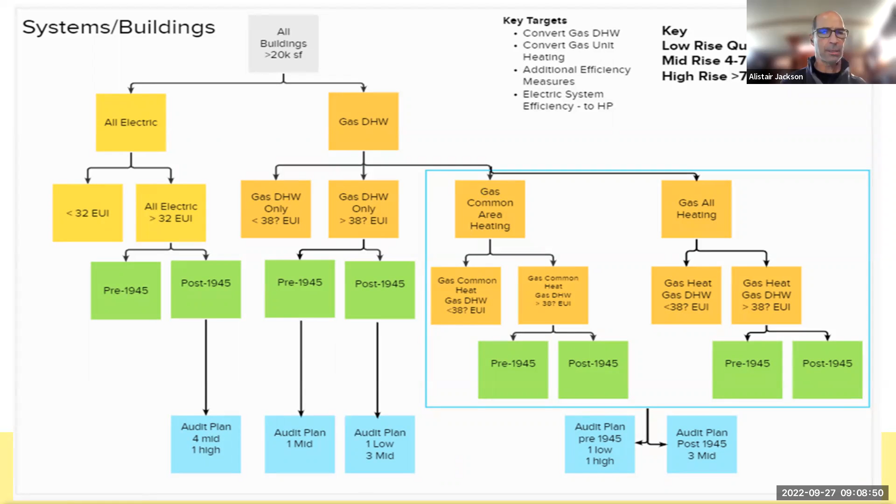Of course, subsequent to all of that, the city's building performance standard has rightly focused on carbon emissions rather than EUI. And so that changed the game a little bit, but that was sort of where we came from. And by the time that change happened, we'd already got pretty deep into characterizing and selecting buildings. So we had a group of 15 buildings initially, narrowed down to the 13 that you see here, which we actually targeted for audit.

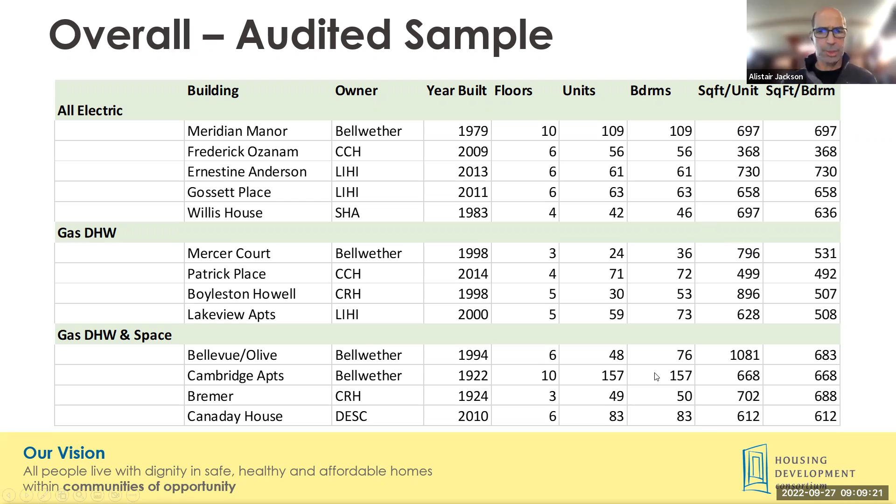And yeah, fairly good mix in terms of ages, sizes. You'll see quite a lot of consistency in terms of the unit areas, with a couple of exceptions, which I think are worth pointing out. The Frederick Ozanam building, noticeably smaller square feet per unit. And I should note, this is the conditioned floor area of the residential building divided by the number of units. It's not the average area of just the residential units themselves, so a slightly different number.

Also Patrick Place, which is another Catholic Communities project, lower than average. And then Bellevue Olive, significantly higher than the average. And again, this is square foot per unit, not per bedroom. And you'll see there's quite a bit of difference in terms of the bedroom to unit counts. So that was the original plan.

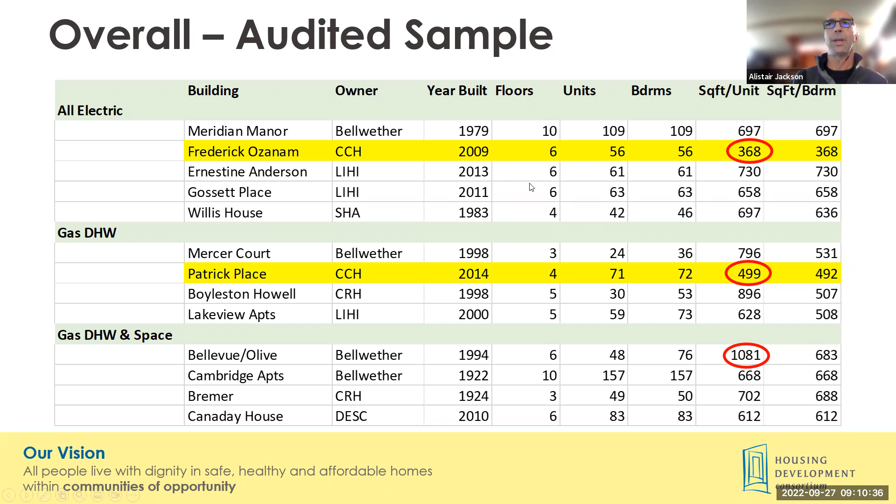Unfortunately, we were never able to engage effectively with Catholic Communities Housing during the window of opportunity. They came back to us ultimately a little after we'd finished the field phase of the work. So unfortunately, we never actually got into those two buildings, but they are included because at least some of the background research and the benchmarking information and the analysis that came out of that benchmark data is all included in the report, even though we don't have physical on the ground audit results.

Just a couple of things to call out here. We're using the OSE benchmark data primarily. There's some background information at the report level of the audits that also comes from the Office of Housing data. So we did combine those two data sets in order to get as complete information as possible and try and resolve and identify any conflicts where we could. For the most part, the numbers you're seeing today are based on the 2020 benchmark data. And it is the weather normalized data rather than the actual year. So a little bit of difference. I will say there are some slight inconsistencies in the data.

And so the numbers that you see here might differ slightly from what you might see in the benchmark information that you look at. But those things will be explained in a little more detail in the report. We've standardized everything to kilograms of carbon dioxide equivalent as the sort of base metric.

This information comes in all kinds of different forms. Pounds of carbon per megawatt hour, pounds of carbon per mega BTU, lots of different numbers. We're trying to be consistent here with kilograms of CO2e because that's the metric again that the BPS is likely to be using.

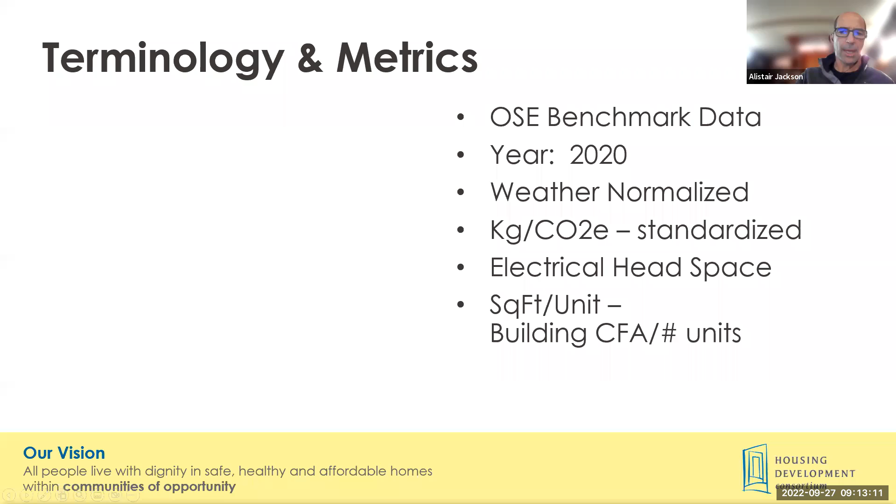Okay, so just to give you a quick summary, as I say, we started off looking at EUI and sort of just to slice this a couple of ways of the 13 buildings. What you'll see here is a summary of the EUIs. And so if we look at that 32 number, you can see that pretty much everybody, with the exception of Ernestine Anderson, who I think is actually right at 32, everybody is above that state metric. So that's point number one.

One of the things that we'll carry forward into the recommendations conversation is if you look at the EUI based on a per bedroom count, you'll see that for the most part, we get pretty consistent information because for the most part, the buildings are pretty similar. The one exception is Frederick Ozanam, which, as I pointed out before, has a high density count. Instead of 650 square feet, roughly, as the average bedroom size, Frederick Ozanam is at about 400, I believe.

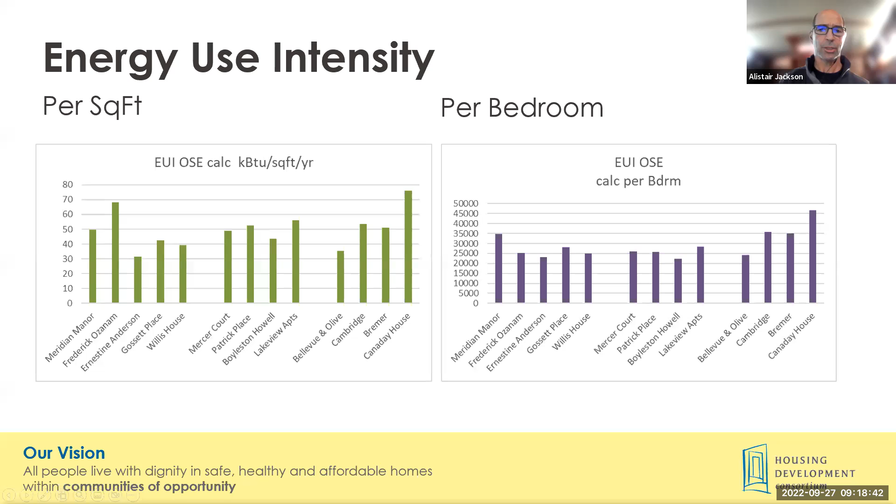So it's probably relevant to think of that in the bigger context, not just the 13 buildings we're looking at here. If the average unit size here is 650 square feet, and in market rate it might be higher than that, that places a higher burden on affordable housing with that higher density than it does on market rate. That's one of the things that I think is a key consideration, and it holds true in the emissions intensity figure as well.

The big difference here, of course, is that because all these 5 buildings are consuming Seattle City Light electricity, and only that electricity, their emissions are very low. So against the emissions targets, as an all electric building, you're in good shape. The difference comes as we start seeing fossil fuel in the building; then the emissions go up significantly, and that's where we have a difference. Does that answer the question? Yeah, it does. Thank you.

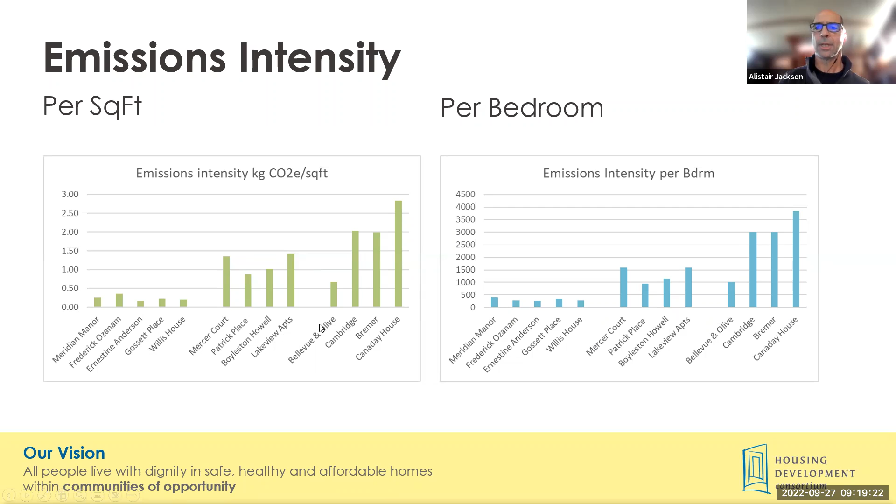Great. So coming on to the all electric buildings, just to bring this into focus, the bars I've placed here are sort of arbitrary at this point, but a reasonable assessment: the EUI is at 32, which is the target for the state clean building standard for multifamily buildings. The bar on the emissions is at 0.22, which may be the order of magnitude we might see from the BPS.

The thing that obviously jumps out is, number one, if you're all electric, you're actually looking pretty good. For the most part, all these buildings are in fairly good shape. The one significant exception is the Frederick Ozanam building, because of this density anomaly. I think this is key, so we'll talk about it more further on.

May I ask a very dumb question? There are no dumb questions. I think I know the answer, but if you're an all electric building, what are your options for reducing your emissions? Is that really just to increase energy efficiency? If this is better addressed later on, that's fine, but I'd love to better understand that. It's a great question, and a key one, but I am going to come on to it further on. If you'll hold it, we'll come back to it. Okay. Yep.

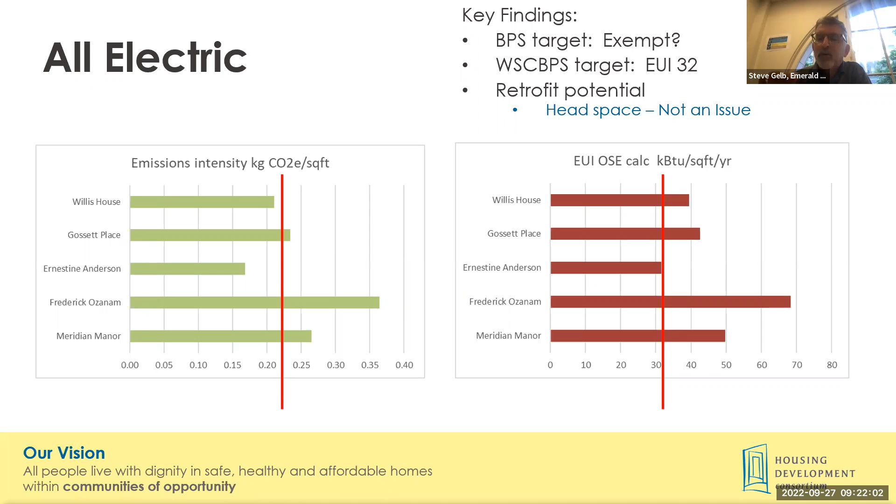Alistair, is that the electrical capacity available in the building with the panel, or the electrical capacity to the building from the utility? Good question, that was my question as well. Yeah, and they are different. I'm not going to go into that in too much detail, but the two levels of priority are: one, what's available in the building, and two, what's available at the transformer.

And is the transformer in the building or is the transformer in the right of way? All of those things are relevant and become much more relevant when we get into the buildings that are currently using fossil fuels and looking to retrofit. So we'll circle back to that as well.

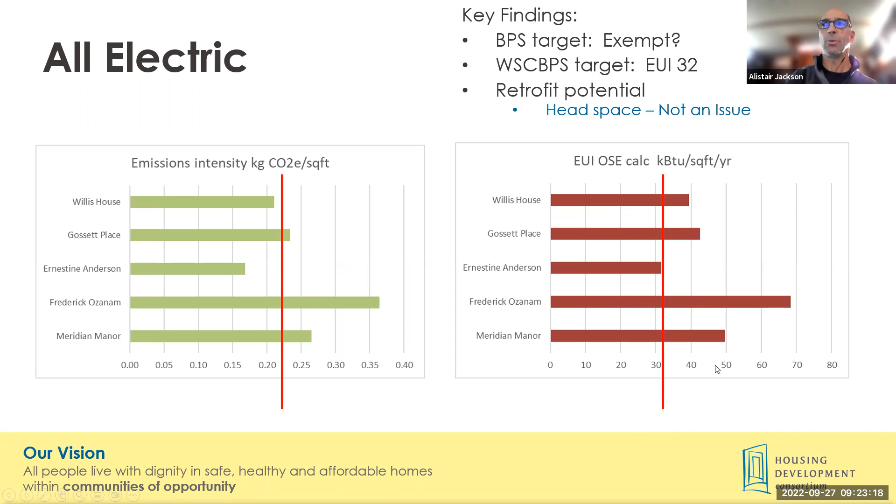I think the key to be aware of here is that the state timeline is looking at a 2026 startup, primarily looking at planning and benchmarking and so on at this stage. But obviously in the legislative process and in the rulemaking, there is this possibility of either incentives available or eventually some kind of regulation of this EUI target. So this is something to be aware of for all electric buildings, is that their EUI may become a relevant factor down the road.

So if we come on to look at the buildings with gas for domestic hot water, obviously we see a very different picture. Emissions intensity increasing dramatically due to the amount of fossil fuel being used in the building. The EUIs not so different between electric and gas. So while we do have an issue here, it's not a lot different from the other circumstance, but here the focus very much comes on to the building performance standard within the city of Seattle, because if the target ends up in this range, then obviously these buildings have some work to do.

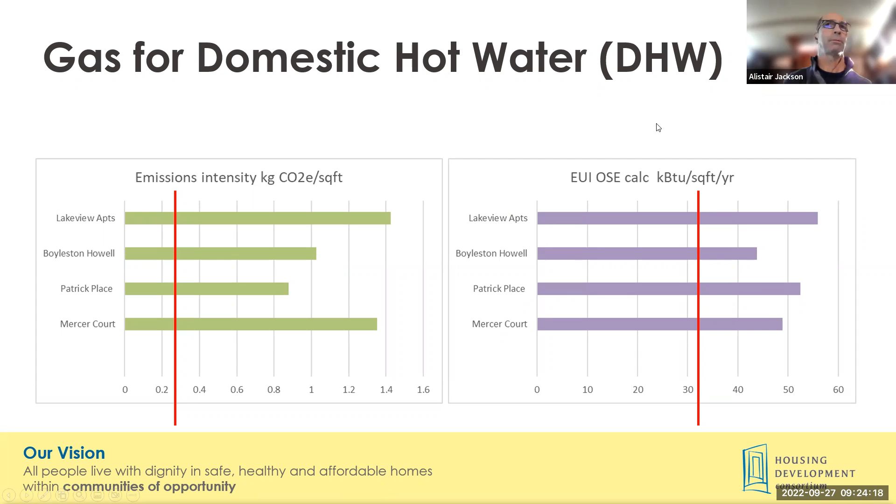And this is where we had this assumption that if we had a small gap, we could fix that by retrofitting with heat pump water heaters. So we did a prototype analysis, made a set of assumptions for how these buildings were. We basically took the full gas consumption from these buildings, made a base assumption for this graph that was an 80% central gas system, and that we were going to switch it out for a central heat pump water heater system with a COP of 2.5. And the result of that is what we're seeing here. Obviously, very significant drop from the original actual intensity to what we're seeing here.

And Jen, looks like you have another question. You're on mute, sorry. Okay, sorry. I'm curious, very curious what's included in the cost, but no rush to get to that. Yes, okay.

Yeah, and again, this number, might as well talk about it now because it's going to come up again. The reality is here that numbers are all over the map for cost right now. This number is pretty consistent with both what City Light found in their cost analysis done early in the year, and also updated with what we've seen and what Ecotope has seen from actual installation. It's a really hard number to draw a bead on. This is installed cost. So this is both equipment and labor to remove and replace equipment. It doesn't include any change to electrical service. So it assumes that we have the headspace.

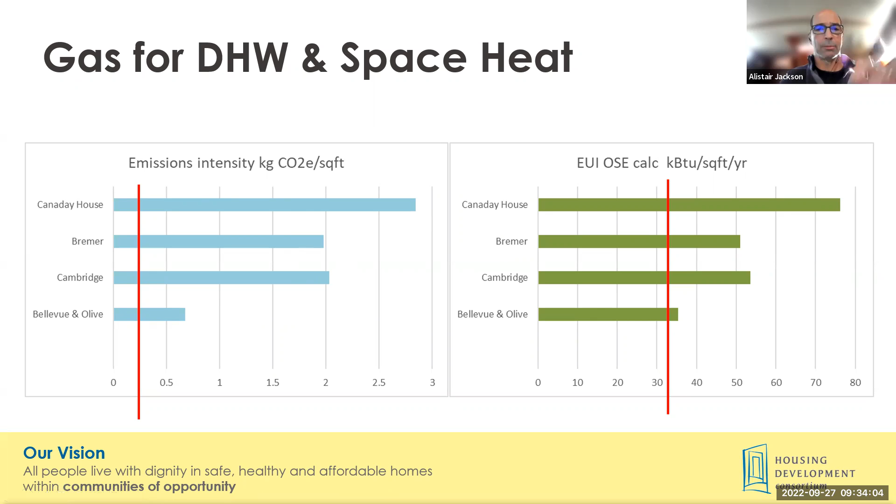So if we take the first step and just retrofit domestic hot water in those buildings using the same set of assumptions, we see a modest improvement, but not sufficient, with the exception of Bellevue and Olive, because the bulk of their gas is still domestic hot water. But with the rest of the buildings, modest but not sufficient to meet the goal. So the alternate compliance path of just retrofitting domestic hot water is not substantial enough to really have a significant impact.

And coincidentally here, because, well, there's some complexity to why it is, the cost per ton is quite a bit higher for these particular retrofits on average than in the other cases, though I'm not sure that's actually a significant finding at this point.

So then if you go the whole way, and here we're talking about switching out both the domestic hot water and the space heat boilers, converting them all over to heat pumps, and switching over gas heat in any other spaces over to air source heat pumps, then we see overall performance coming down to where we would want it.

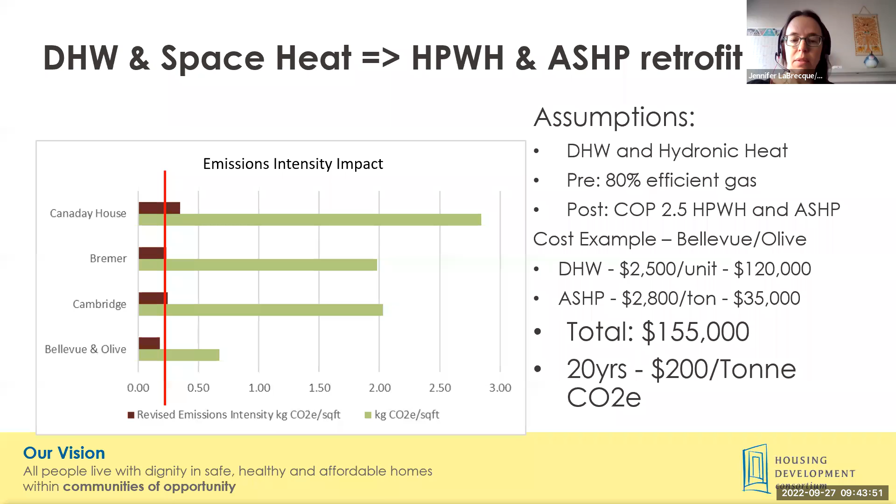Yes, and actually I have a slide at the end that talks about that, but yes, the report will have individual building information, both in terms of the characterization and the specifics of the building, and some analysis of the costs and impacts individually, again, based on this rough order of magnitude pricing rather than a specific analysis. The only way to really get a good number is to get in and have the professionals actually cost out the equipment.

So I just wanted to do a quick touch base on the timing. I think everybody's probably aware of this already. The program likely comes into force in 2026, but for affordable housing, really 2031 is the first cycle where things will really start to become more focused. 2036 is when you actually have to meet the emissions target. So we're still a long way out, but clearly in order to get to that point, planning and taking action sooner rather than later

is critical. Obviously thinking about financing cycles, asset management cycles and planning and so on. So definitely needing to act sooner rather than later, and depending on how the funding works out for this, potentially good value in being an early mover rather than a late mover from that point of view.

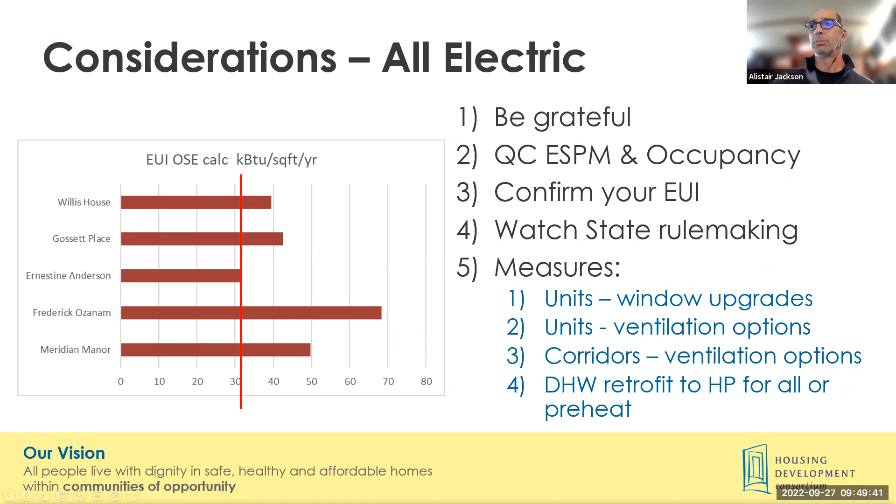The two other options in corridors are just turn the heat off in the corridor, which has been successful, or replace it with heat recovery ventilation, which is a middle ground. Both have been successful. Yeah, seems doable. Yeah, I mean, I think there's a line to walk in terms of thermal comfort, how you meet those loads, who's meeting them. If you turn the heat off in the corridor, what does that mean for somebody paying for the heat for that space? But yes, all of those are options.

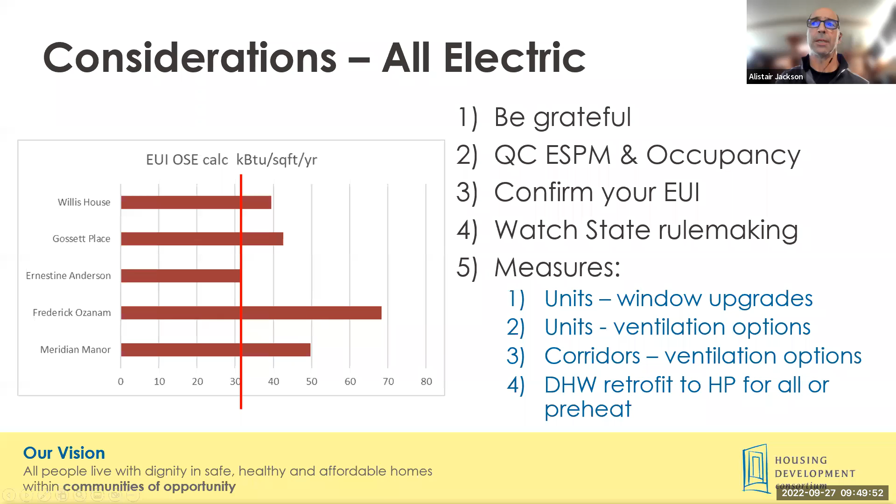As far as the gas hot water situation, this is the headspace conversation primarily. Do you have the capacity? And I think here the first step is to check with Seattle City Light. We got some data from City Light in terms of what the capacity at the transformer is. And again, if the transformer's in the building, that is a benefit. If it's out in the street, what does that actually mean? Versus what the peak load is. So there's a little data that's generally fairly easily available.

And then if it's unclear from that, the next step is to do a more detailed load analysis, looking at the panel layout and panel capacity. And that gets pretty complex, so a pretty significant engagement with an electrical engineer to do a load analysis. We will have some costs in the report for what a typical analysis would look like and would cost. Once again, if you don't have enough headspace, what are the options short of increasing capacity? And if there's a limit at the transformer, that obviously becomes a huge expense very quickly.

But is it possible to look at load reduction to get load off the system elsewhere and to shift the load? So both reducing load by switching out appliances. There's one project that we were looking at that created a significant amount of capacity because they decided to switch out their electric ranges in all the units and get rid of the oven altogether, which led to a significant decrease.

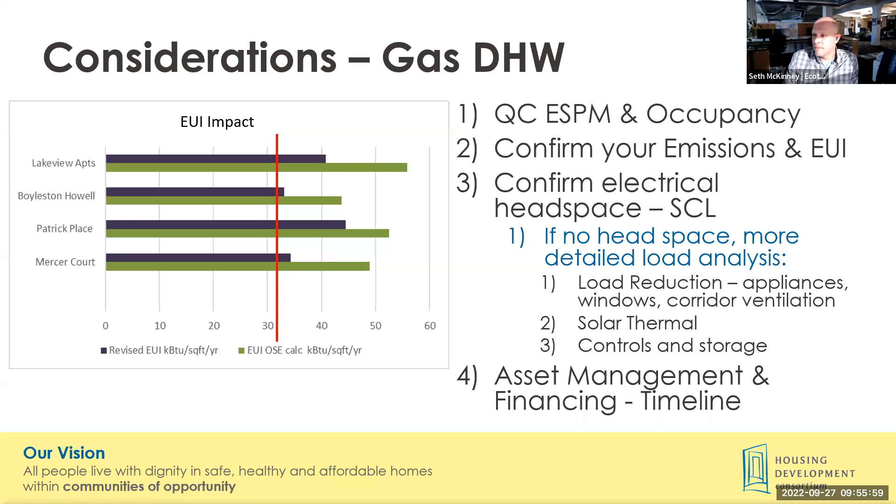Seth, just on the solar thermal component, do you have any kind of reaction to that? Just quickly, it's something that's come up more just recently, and I haven't had a chance to bounce it around a lot. Not off the top of my head, no. I think it's a great idea, but I think folks in the office have found that it doesn't always work as well as we think it does. Yeah. Definitely some challenges. Okay.

And so then the last slide, really all the same issues as far as the domestic hot water and space heat issue. And as I touched on, there are a lot of big questions when it comes to the hydronic heat question and what the potential for retrofit is. These ones in a magical world could be fairly straightforward, but in the real world likely are always going to be fairly complex and need a great deal of analysis and a great deal of planning.

And then the other main points I'm making here, I think we've touched on already, where we've got particularly corridor heat and ventilation. There's clearly opportunities depending on the infrastructure in the building. If there's only one shaft for outside air, it's pretty expensive to try and do anything with it except reduce it, stop heating it, as Seth suggested. Where there are two shafts in the building, then that does create the opportunity to start looking at a balanced system with some energy recovery. So a lot of more detailed analysis to get to squeezing down all the components of the load in those situations.

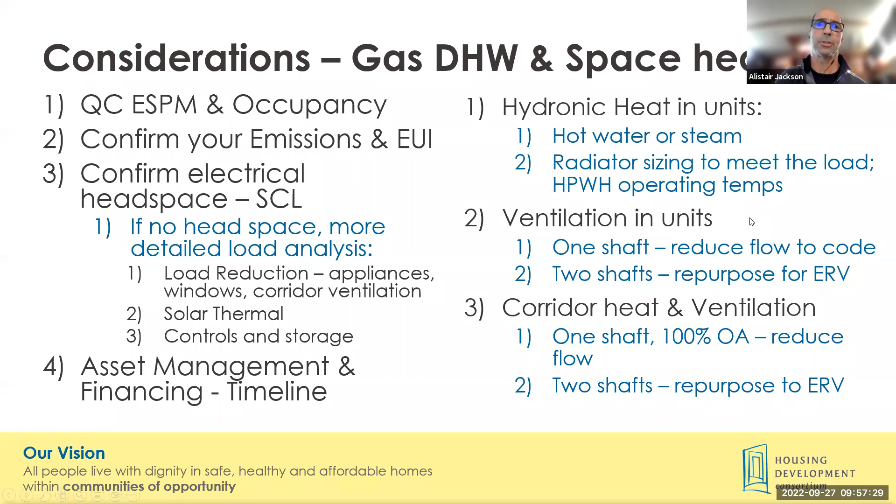So what's in the report, I already kind of covered this: findings on the buildings in general, decision trees and the what if scenarios to help plan those things out.

More on cost data on the specific cases. One of the things that was clear is that we're not necessarily capturing all the right information. So a summary of what are the things you really need to be thinking about when you're doing a capital needs assessment. What do you need to add to that scope in order to get the information you need as part of your cycle? And then also just the building-specific information, details of what we found in the buildings, all part of that report, and that will be available publicly.

And I think I've touched on these in terms of feeding this conversation about recommendations. There's alternate compliance, there's a DHW retrofit as a sort of standard one-stop opportunity, what the benefits and limitations of that are. Thinking about an adjustment for occupant density, I think, is critical, because some buildings obviously are going to be burdened more than others from that point of view.

The substantial alteration trigger is something that has come up in the discussions more recently, that this can be a real challenge if doing retrofits to meet the BPS is going to trigger a substantial alteration, which will then place these buildings under a need to comply with the new code across the board. That clearly can make things unfeasible, economically much more challenging. The capital needs assessment I've already talked about, and the other things as well.

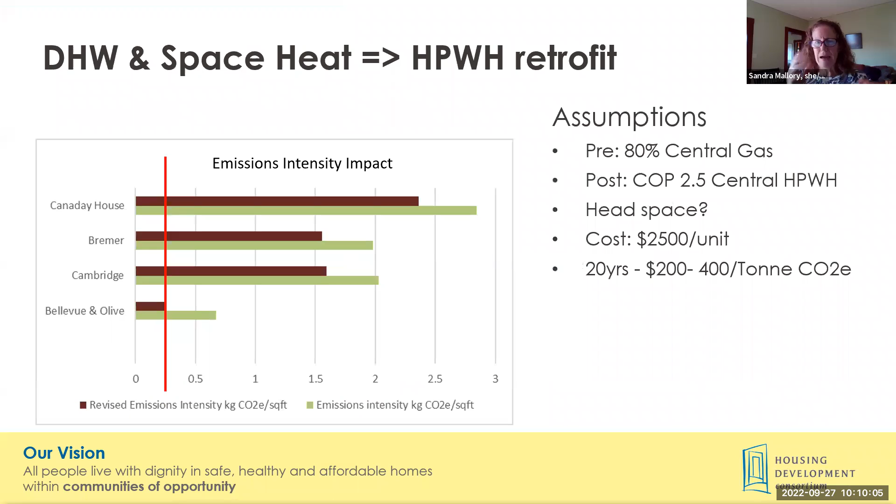So I was actually going to ask you to go back to a slide, Alistair, which is basically the greenhouse gas emissions per, I guess, square foot, when you are removing the domestic hot water. And maybe what I'm trying to get at is understanding, domestic hot water is often a big emissions load in multifamily buildings, and it's often the only load, right? If you've got electric resistance heat. And so trying to think about, as we are setting the targets, setting them both on a sort of linear path, but also what's achievable, right? And it seems like one of the first or only big moves in multifamily is domestic hot water.

And so if that in and of itself gets you to the emissions reduction, then, golden. And so that's interesting that this is not quite doing it. Which is weird because they become all electric in this scenario, right? Yeah. Okay, so then that will work, but what I'm not seeing is, and we'd have to back this out maybe, but the reduction.

So my question to the group is actually this question about a prescriptive option in lieu of a target. And so the question being, if doing the work of, say, eliminating domestic hot water in a building gets you to the target, do you need a prescriptive option? Or is there a reason that it makes it simpler to just think about changing out the system instead of calculating the greenhouse gas intensity? I don't know if I'm quite making sense, but if you meet the target by doing this, do you need the prescriptive option?

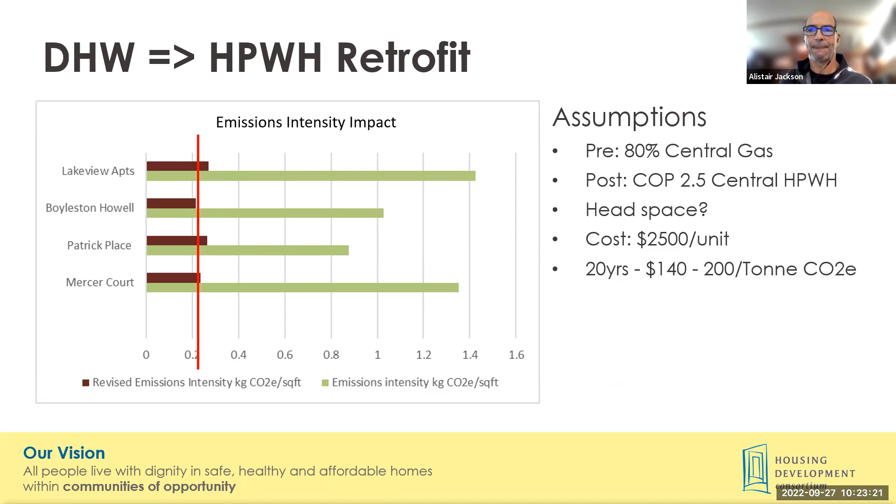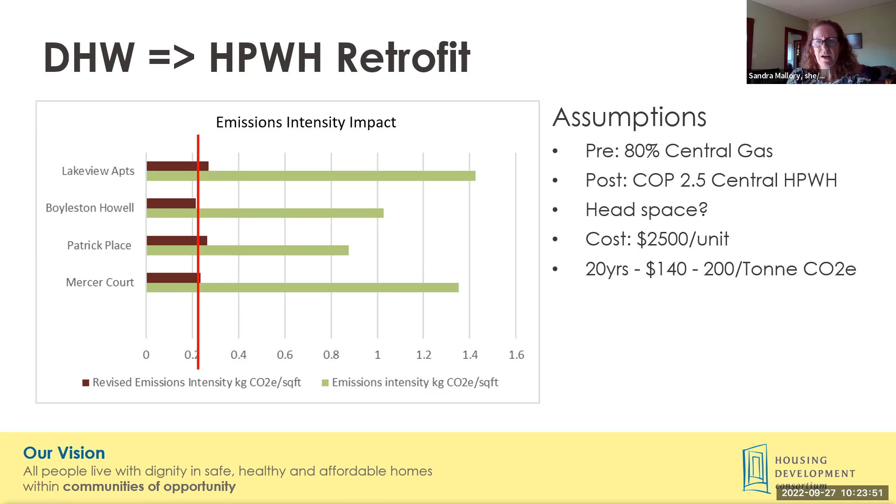Hey, Sandra, can you just remind us? So we have the two standards being developed by the state and the city. And so for multifamily buildings in the city of Seattle, they're going to have to comply with both? Or is it an either or? It's a both, and that's true for all building types, is that they comply with the energy standard through the state and then the greenhouse gas intensity standard through the city, which is, I think we all recognize, not ideal. And they're two different metrics, right?

We are coordinating with the state as much as possible on how we might, for instance, model our template after their reporting templates, things like that. Just an aside, through the Infrastructure Act, there's some federal money around code. So we're talking to the state about, especially for multifamily and smaller commercial, where those buildings aren't yet required to comply by the state, could we look at what that combined option might be? Yeah.

Bobby, I don't know that all owners in Seattle share the goal for Seattle to be more aggressive. I just think most owners want the simplest, most straightforward option. You know, kind of back to that, like having a menu of choices of saying, how are you heating your building? How are you heating your water? And then, what are your windows? All the big things we've already talked about. And then, how can you identify strategies for those big components?